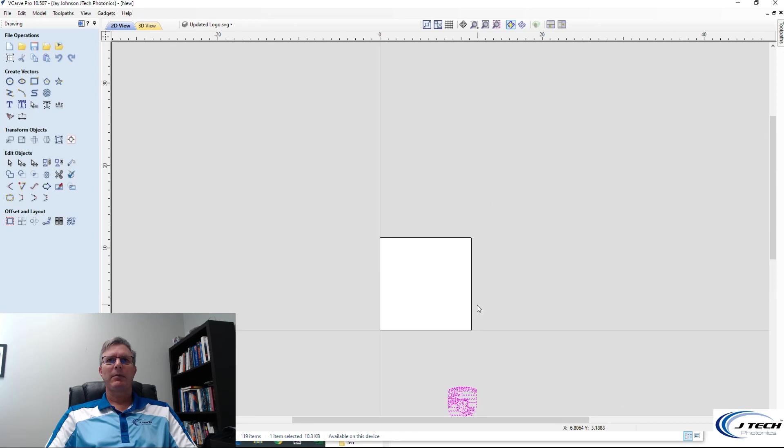We're going to now go in and import our vectors first. We have our vectors saved here, and first the Porsche logo that we created. We just used some Inkscape trace features to make it. Let's see, it's probably shoved down there. Yep, there it is. We can go grab it and move it up here, kind of put it in the middle there. All right, so as you can see, our project is going to be kind of a plaque for car enthusiasts. We are Porsche enthusiasts here.

So we're going to move this over to the left just a little bit to give room for what we're going to put in here next. Just kind of slide that over a little bit. And then we're going to...

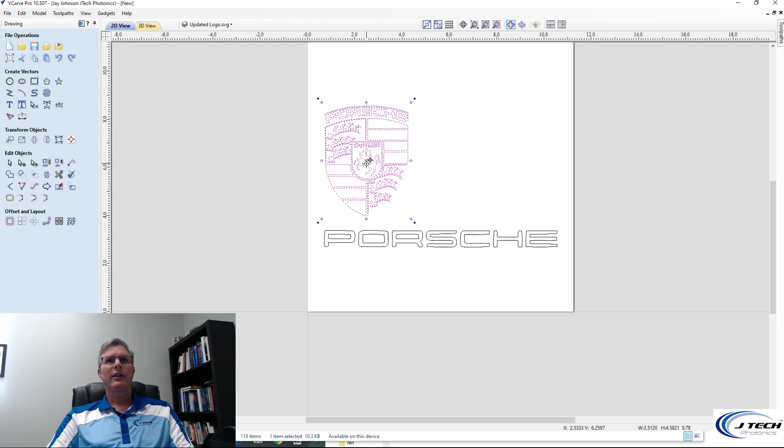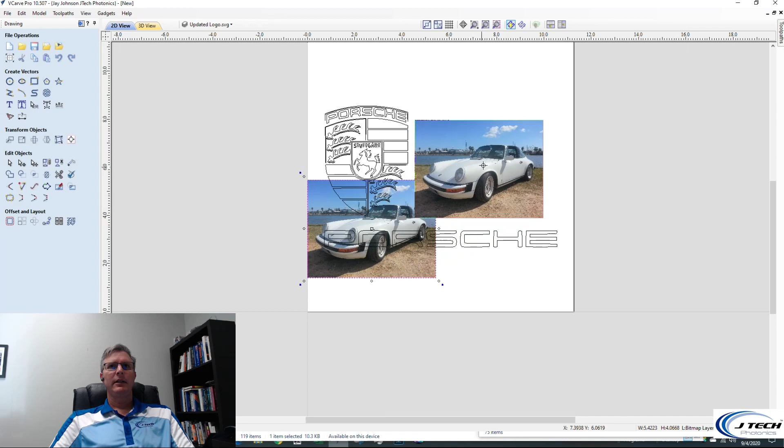Import in our photo. So let's go over here and import a bitmap, and we're going to have the photo go in. Here it is, open that. That's a little too big, so we're going to squish it down a little bit. We're going to have it over here on the side so it looks kind of cool.

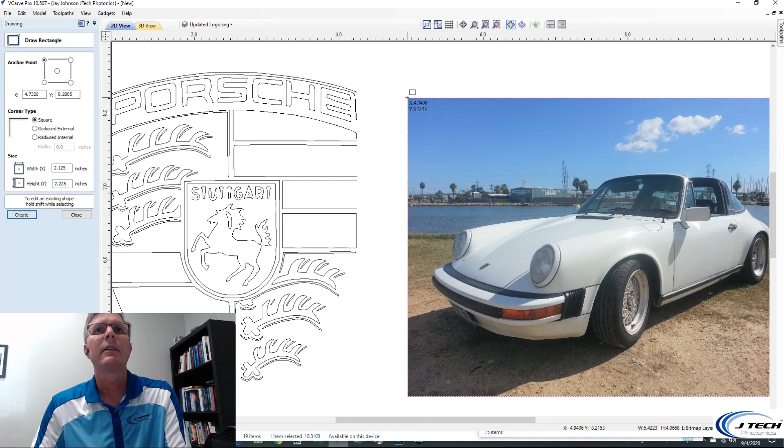All right, so let's get it all lined up. Last thing we'll do is put a rectangle around this. I'm sure there are easier ways of doing this, but this seems to me to be the way I'm doing it.

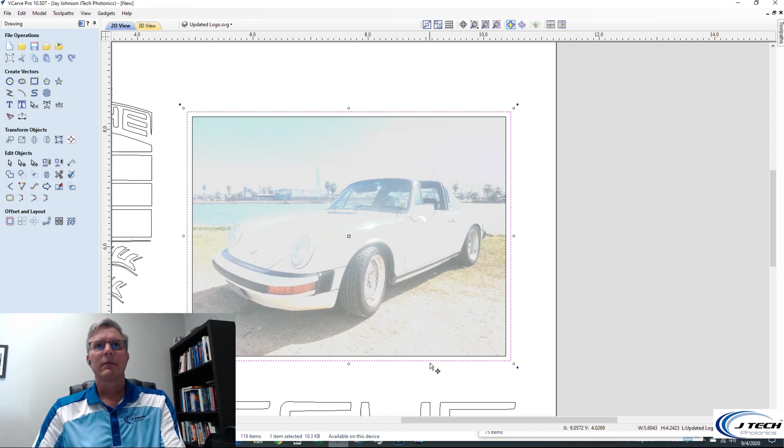Then we're going to also make another rectangle to have it so you can V Carve. Just have it a little bit bigger than the other one, to make a nice little border. There we are. Okay, so now we've finished that, getting that all done.

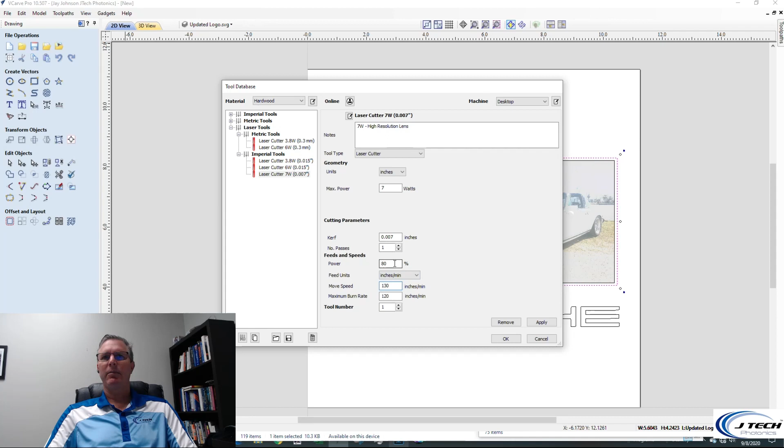We're going to go up and check out our tool database and set up our laser tool, make sure it's in there. So we're using the 7 watt JTech on this with the high resolution lens. Our power is going to be 7 watts. The kerf on this we're choosing is 0.007. I'm going to do about 80 inches per minute... and let's do, I think, 130 inches per minute, sorry, and 80% power. I'm going to apply that and press OK.

Actually, let's go check and see we have our V Carve bit in here. V bit, we're going to do a 60-degree 1/4 inch. Ours has 2 flutes, and it's the standard default feed rate and everything, 45 inches per minute and plunge rate of 15 inches per minute. We're going to use that, so it looks like we have both our tools.

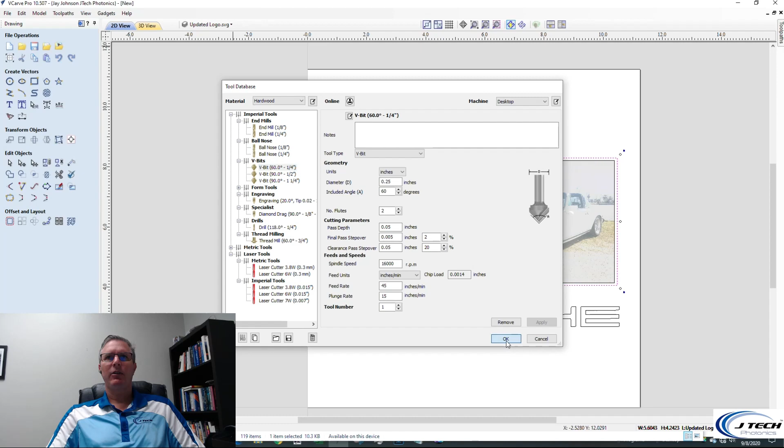So let's go and get in and start generating our toolpaths. The material setup, might as well go look at that. We have the default here. Our Z-gap is 0.2, and then 0.8 on the Z-gap above for home start position. That seems to work okay for the V Carve. So we're going to start first with the V Carve. We're going to select our vectors here, these.

I just hold down the Shift and Control key to select multiple vectors.

We're going to set our depth to 0.125 for the V Carve, giving us a nice deep plaque kind of look. So this is our V Carve 1, and I'm going to calculate that.

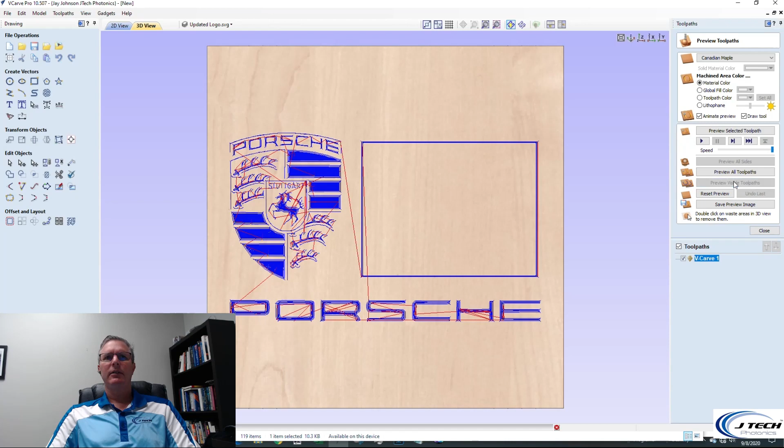Okay, and that's what we have. Let's do a little preview. It should look something like that, that's going to be nice. So we will save this toolpath.

We're on a Shapeoko 3 right now. If you're on a GRBL machine, which is what we're on today and can do pictures, you can use the standard GRBL one. We're going to just choose the Shapeoko 3 one. If you have an X-Carve, you can use the X-Carve one.

Let's see, Shapeoko 3. That's kind of small. Shapeoko, okay, so Shapeoko inch is what we're going to use for our post processor. And we're going to say save toolpath.

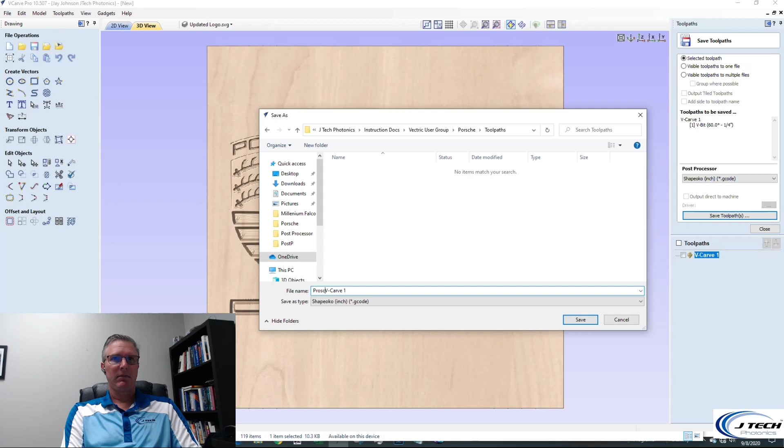And there you go, we're going to put another folder in here, called Toolpaths. V Carve, okay, so that's the V Carve toolpath.

All right, so for the next vectors, we're going to use this new laser module. We're going to do laser cut and fill. These are the same vectors. We're going to basically carve them first, and then go in with the laser and fill them. Some people use paint and things like that, but this is just an easy way to make it look really cool and have it filled with the laser. So we're going to go in and do that.

First thing we need to do is go and grab the JTech laser post processor for the laser module. This one is going to be over here, the Vectric laser module post processors. So we need to go down and do the GRBL one. We're going to click on this and say save link as, and save it here. Then we can go into Vectric and install the post processor right here. We've already done that on this one, but you can just install that downloaded file.

So we're going to click on laser cut and fill, and we have the JTech 7-watt tool. For this one we messed around with it a little bit, and the color we liked turned out to be a move speed of 130 and power of 45%. It was overburning a little bit at full power, so we just cut it down in half. We're doing a hatch angle of 45 and a step over of 0.007.

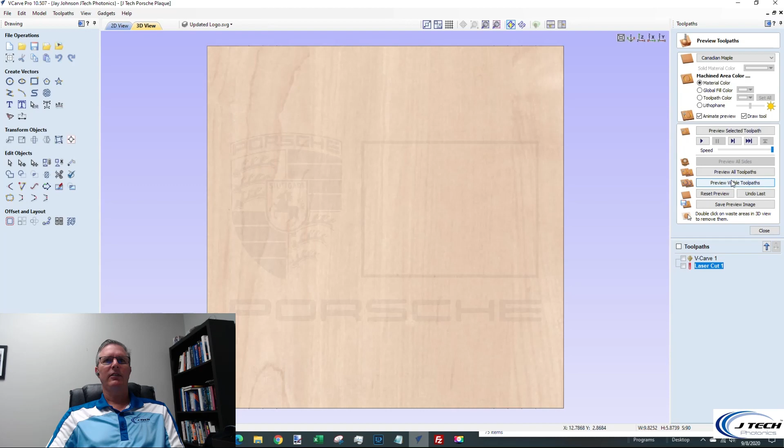So let's calculate this. Calculate it. All right, let's preview it again. So now you're going to see the laser toolpath, and then the V Carve on top of it. Let's preview all toolpaths. So it's going to go and carve it, and then go on top of it as well to color it in.

So let's go and save this laser cut toolpath. The post processor is going to be the JTech GRBL, and we've done a couple things with it. For doing vectors, the standard Vectric one will work, but it has Z moves in it. For the laser, we really don't like all the Z moves up and down. You can set your Z's to be really small if you want to use theirs, but I think using this JTech GRBL laser inch post processor works out better for us, just because it removes all those Z up and down moves, so it makes it go quicker. And you don't have to worry about Z—once you set your Z height, you're good to go.

So I'm going to just save this laser cut toolpath, and we're just going to go and put it in here.

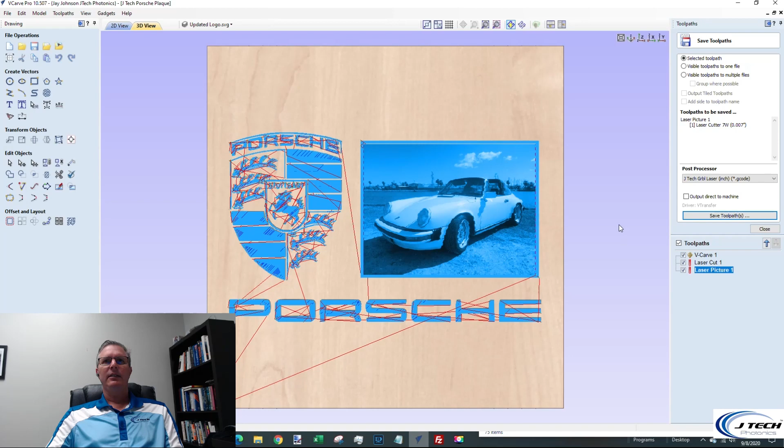So now we have our 3 toolpaths here, laser picture 1, and we have them all exported, so let's go set up our machine.

All right, so here we are setting up the wood. We've put tape underneath it so we don't have to use clamps, and we're going to be using the origin at the front left of the plaque board.

So we're just going to line up the V-bit to start the first of the carves. This is the 60-degree V-bit for the first carve, the 1/4 inch 60-degree V-bit.

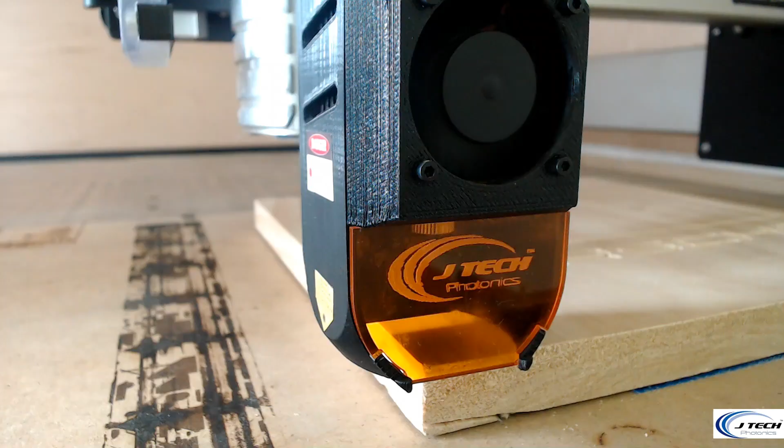Now that we're done with the carving section, we're going to line our laser up to the 0 origin in the front left corner. We're going to adjust the focus first.

It needs to be 1/8 of an inch above the work surface. We're going to use our little focus tool. If you don't have a focus tool, just measure 1/8 of an inch, or get something that's 1/8 of an inch to use as a tool to figure out what level the shroud needs to go to. It needs to just be able to slide through.

So you don't want to be pressing down on it. You want to see right at the moment that it's just enough to slide right underneath it, without being totally touched.

Then we're going to take the laser, and notice it's a little off, so we're going to move it a little bit left, and put it right on the edge of the corner.

It's important to set it at the same point as where your bit was, because you want both projects to be lined up when you fill it in, since it's going to go right over where the carve was. You want it to basically be exact.

There are other ways to do this. You could put an origin, like a target, a little bit off the workpiece, which we've done before. But since we're not cutting out this plaque, and the outside of the work area is the boundary, we chose to just use the corner.

But if you are cutting it out, you could put some vector somewhere outside of where your cutout is, mark that with the router, put a divot in there, and then line it up with the laser. So I think we've almost gotten it done here in terms of lining it up.